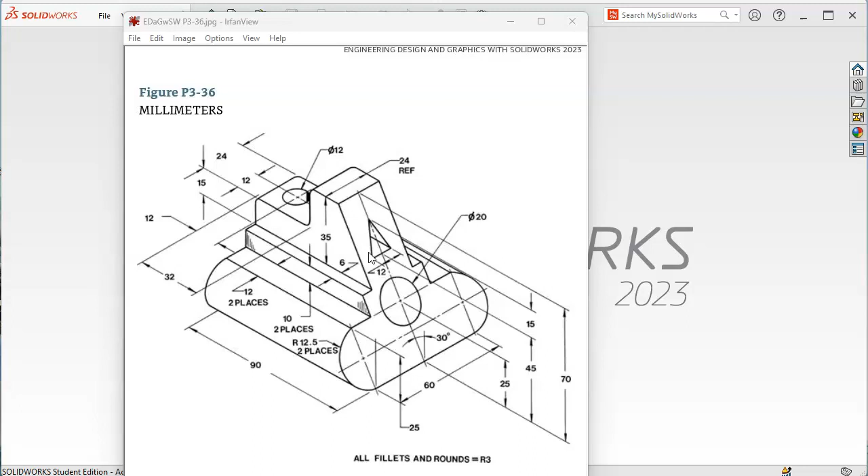The other issue is with this kickback 30 degrees, these geometries, we're just going to assume that they're on the face and that they'll probably be a little bit skewed, but within our tolerance zone for what we're designing of a widget, that this shape, the little cosine error will not be overwhelming

for our geometry. If we needed it and we had to cut that shape, there would be a slightly different result, but let's make this easier, not harder.

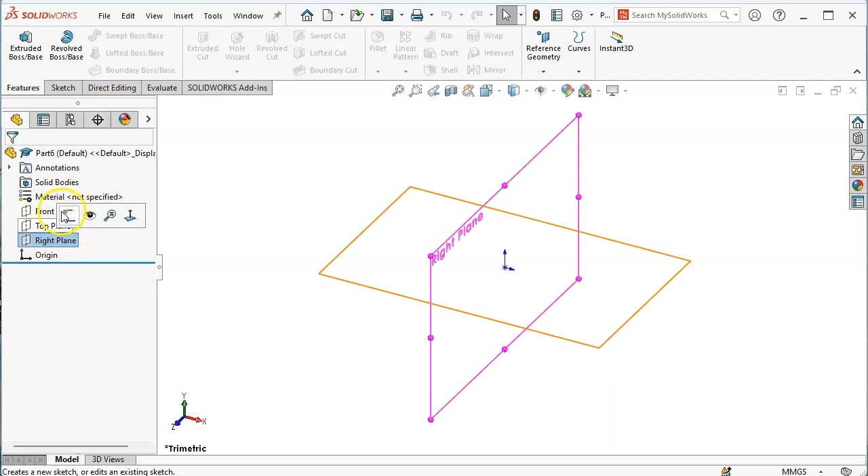Okay, new, same as coming over to the new, and we'll open up the sketch on the right plane. You should be getting a real good feel for symmetry and picking the center line. This one we want vertical, infinite length.

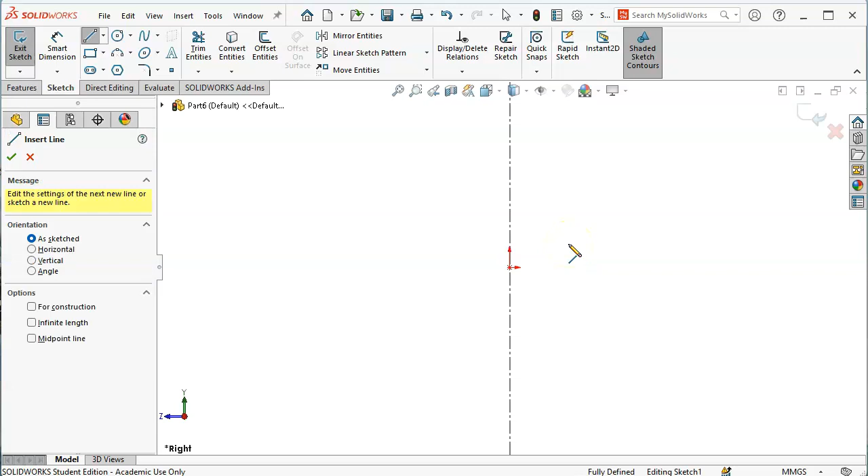Place it on the origin. It's easier to escape than it is to try to back out the line command. So L on the keyboard.

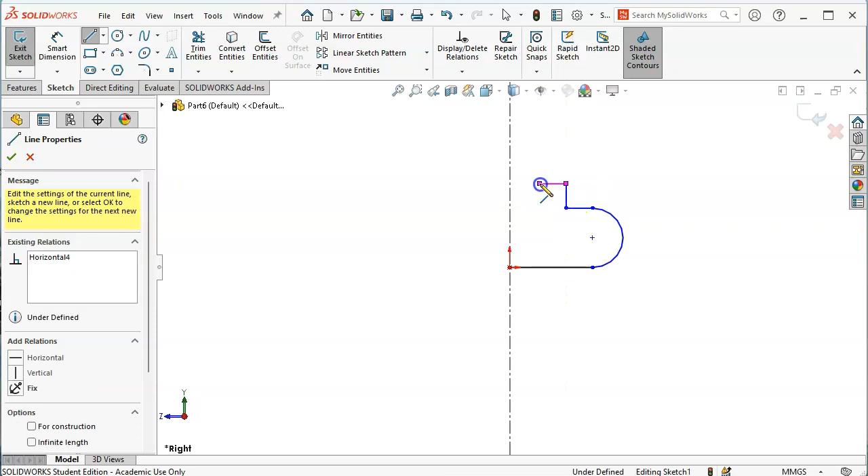We'll start at the origin, and I do want to take advantage of the continuous arc here. So if I draw the line, go back to the starting point, then I can bring my arc up and around. So up, over, over, up, over, right click, select, window pick from right to left, mirror entities.

Looks pretty close. Smart dimension, we're going to go with across the front to the centers, so pretty much that line is 60.

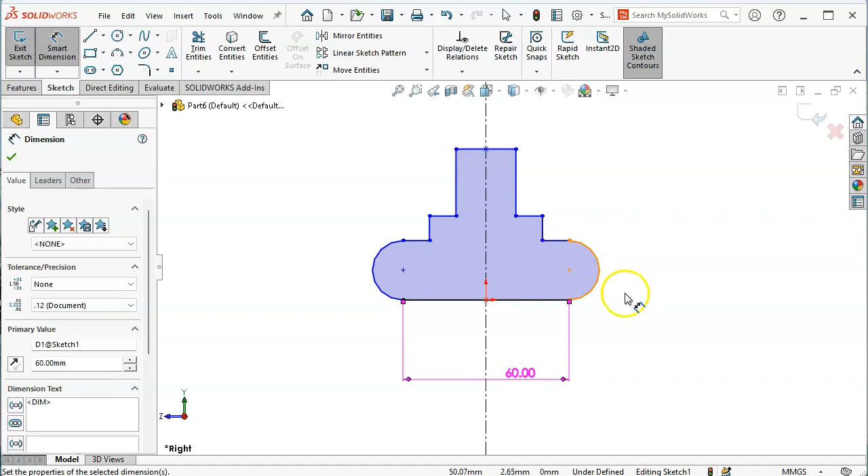The height is 25, so we're either going to go with the 12.5 or the 25, so 12.5 will work.

We have 6 millimeters across that flat, 24. So somewhere, I guess the 24 reference, we're given a 12 there.

Let's see what we have for heights. Have the 25 there, the 15, 10 millimeters on the step.

And that's kind of the problem with the dimensions overlaying the part. Sometimes they're hard to see in 35.

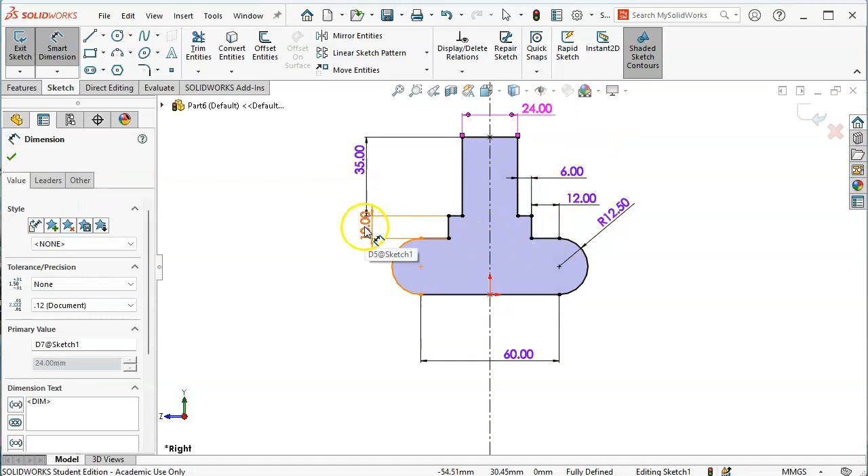So the reason that the 24 then is a reference, in this case it's going to cause us to be overdefined because the combinations of 12, 6, 60, that should be a resulting number, not a driving number. So let's go,

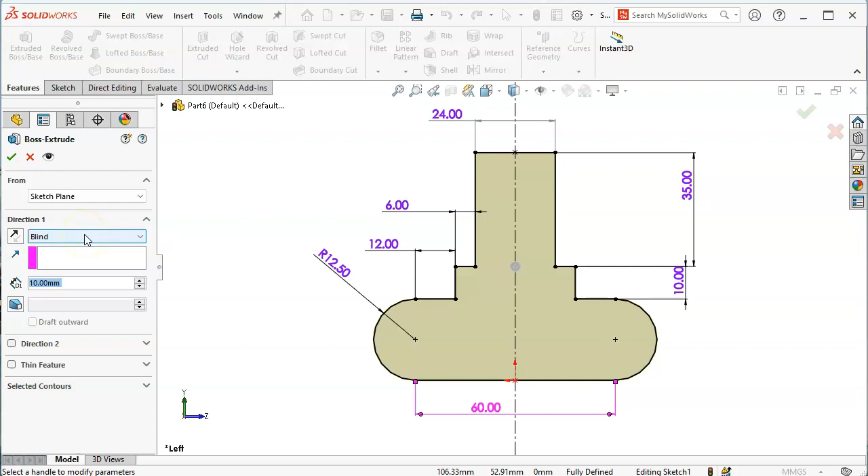playing with the views again, let's just go with the extrude. We have an overall of 90, and we'll go ahead and accept.

All right, so the origin ended up over here. If I want to reverse that, I can switch the direction, but I pretty much have to make that decision now. It messes with the other sketches if we wait too long on that one.

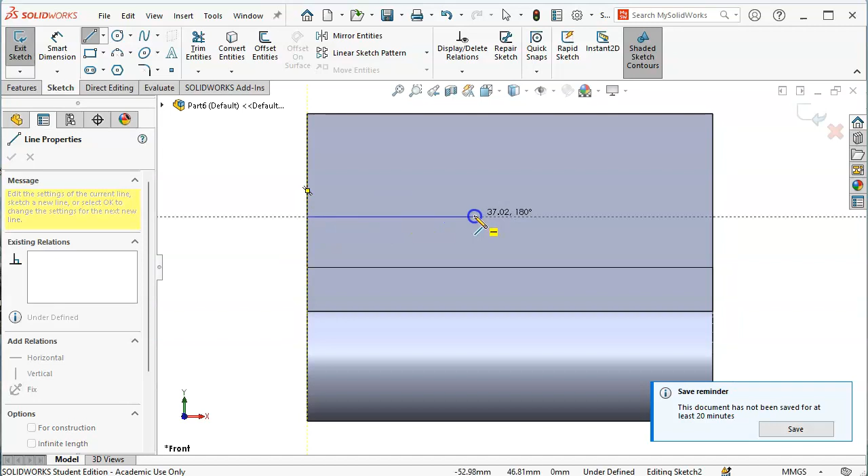So front plane sketch, I'm going to go with the open contour, but with the open contour, make sure that you connect enough geometry that it is continuous. So if I set my pencil down, go up over, I will be able to cut

all the way through. If I eliminate that line, then I pretty much have to draw the other two lines to close off the region.

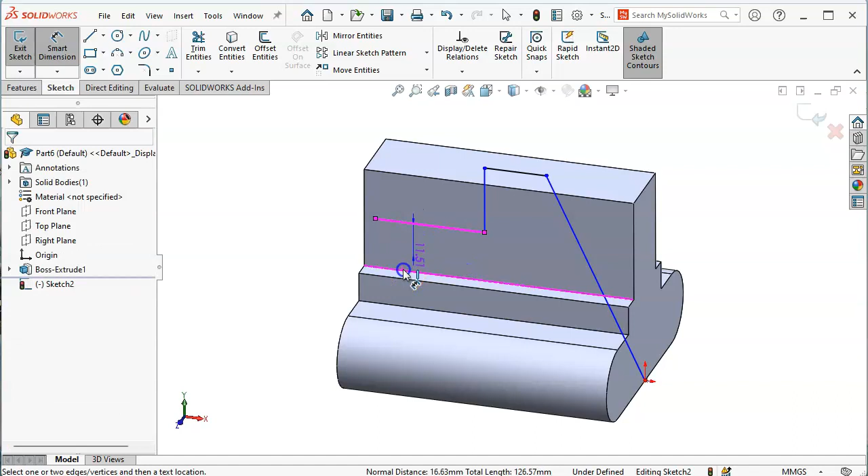So our dimension is 15. Nope, that's from the step. So from the step up is 15.

Let's go back to Control 8 to get in looking at our geometry. We have 32

and then 30 degrees. And as I go through the angles, it's going to show me the other solutions. So we can just keep moving until we figure out which one we want.

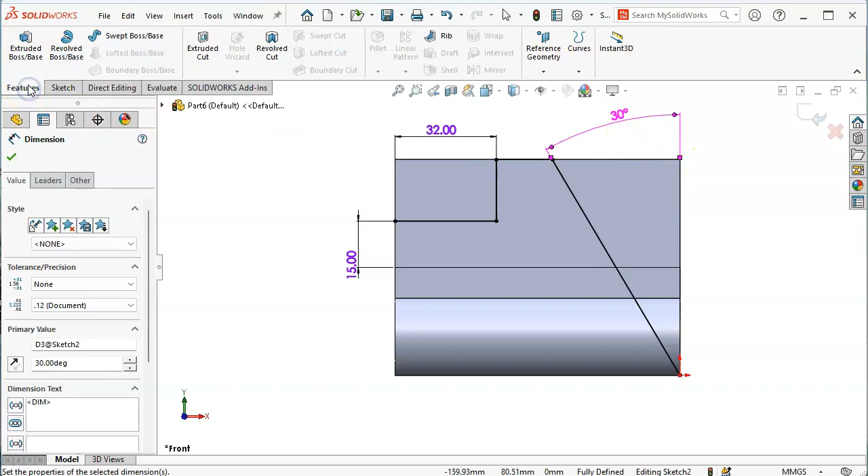Extrude cut through all and through all.

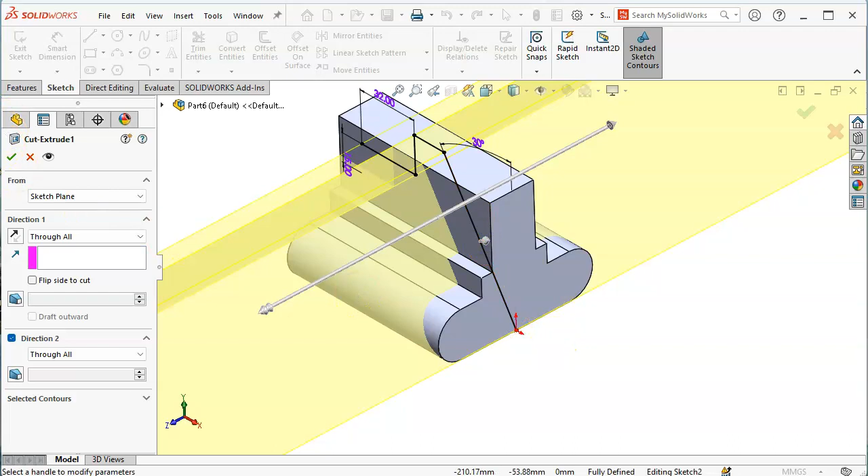And I forgot to look at the little arrow. So if we edit that again, the arrow is pointing this way, which was the desired result. If I flip or hit the arrow, then that's going to determine which side the cut gets made on.

All right, so I did not put the geometry on the end face. So let's go to the right plane again, and we'll sketch it in. Maybe we'll throw that one in there as a direction of cut.

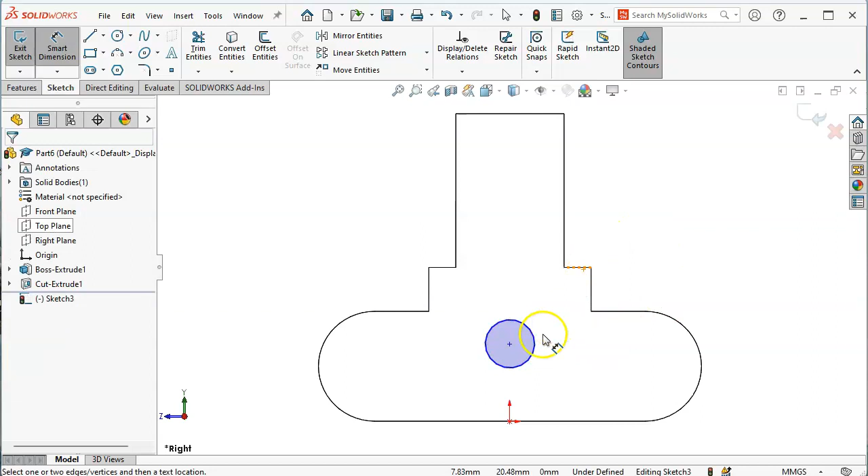All right, so we have 20. And let's go ahead and put the 25 on before through. I'm not sure if that's going to move, so probably safer in this case to not align it to the edge. The center point and the origin can be vertical.

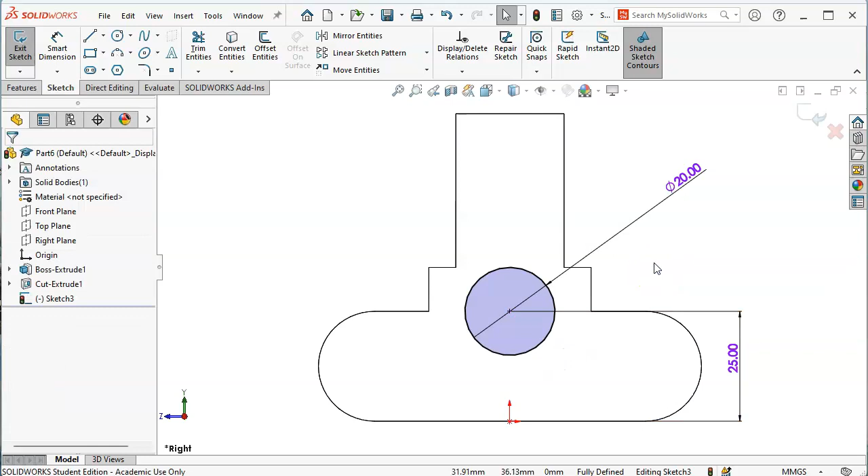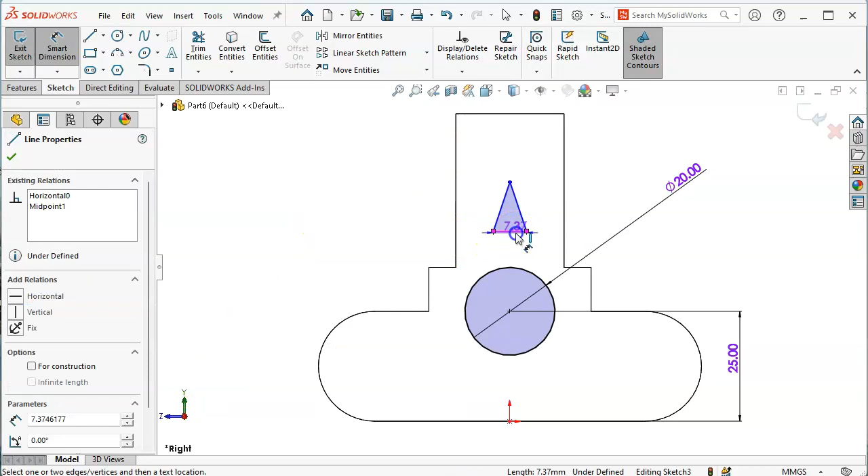And then if we go with the triangle, then I'm going to right click, select the midpoint, control select the vertex, control select the origin, and make those vertical. All right, and then our width is 12, and the height is 15.

And the bottom is 45.

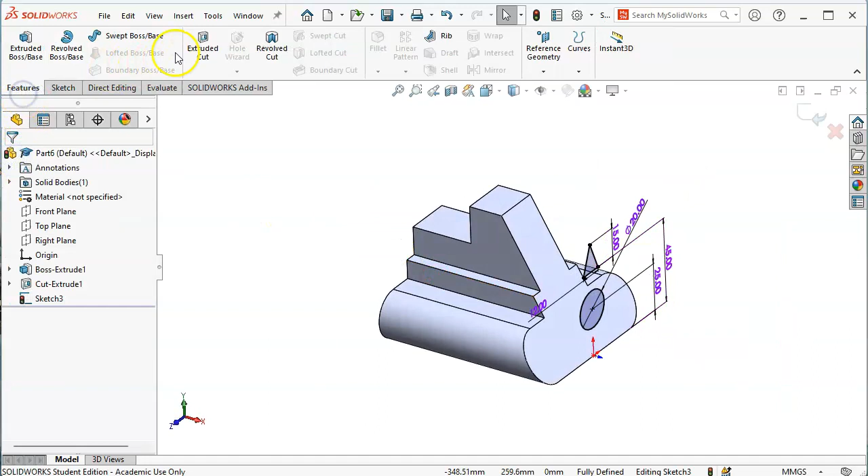Okay, so if we cut extrude, and I tell it to go through all, I can see the preview and I have to decide, well, is that what I really want? So in this case, everything's closed and I don't have to use the selected contours.

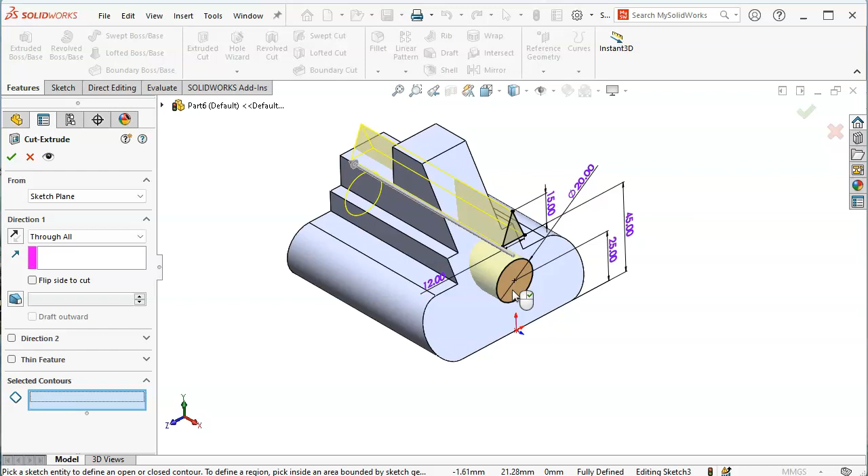But if I want to use the same sketch but have different end conditions, then I'm going to have to create two features using the same sketch. So let's just say the whole thing can go through all, and expanding out, selecting the sketch, doing an extrude, we go back into the contours.

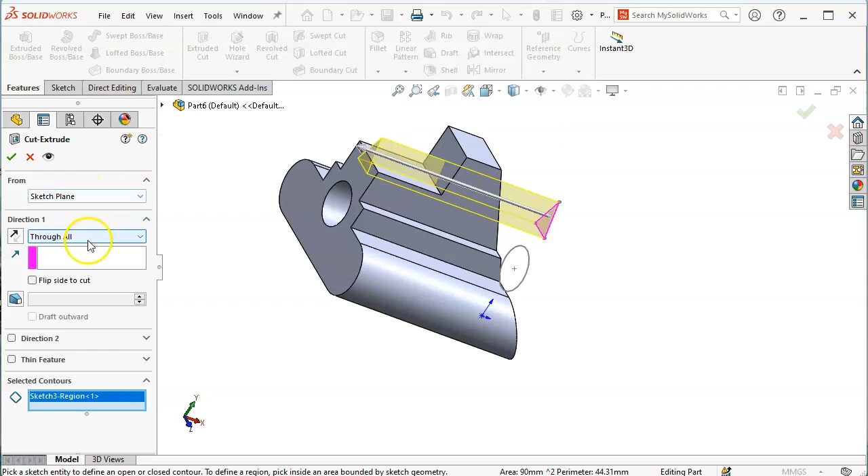I usually clear out sketch 3, and then let's just tell it to terminate up to surface, and we'll pick that surface. And it doesn't quite go all the way through.

The other item we might do is up to vertex. All right, so up to vertex and up to surface in this case produce the same thing.

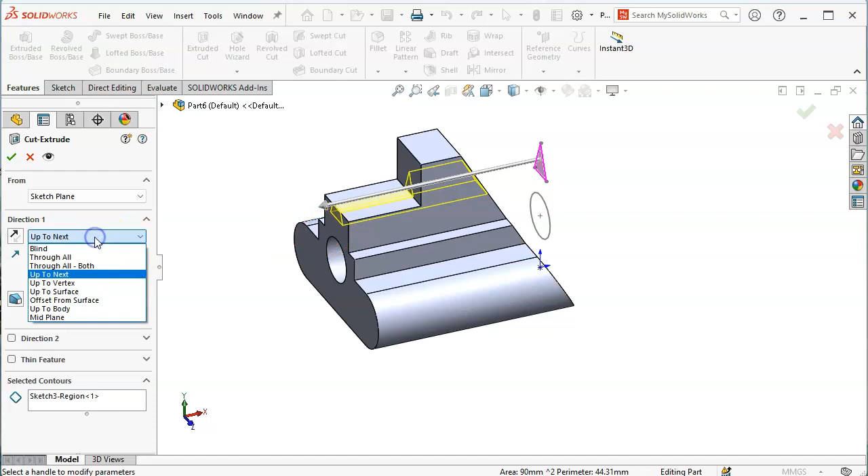If we wanted to offset a millimeter from that surface or generate whatever, we could run through that. Up to next, well, it's going to find the end geometry. So let's just stay up to surface, pick the face, and go ahead and hit OK.

So that's kind of weird geometry, but we'll go with it. All right, so from that surface to the vertex, and we go find our measure tool. So over to evaluate, measure, and we'll extend that out.

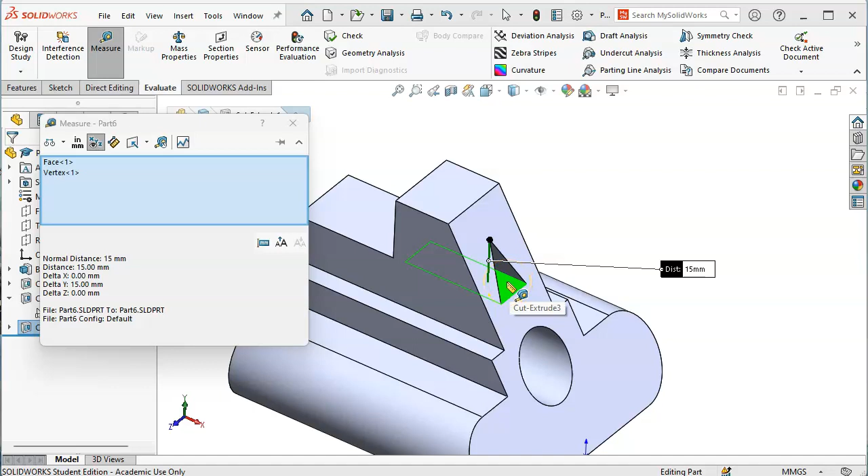Well, it's still at the 15 millimeters. So in that case, the geometry did not get skewed. There would have to be...

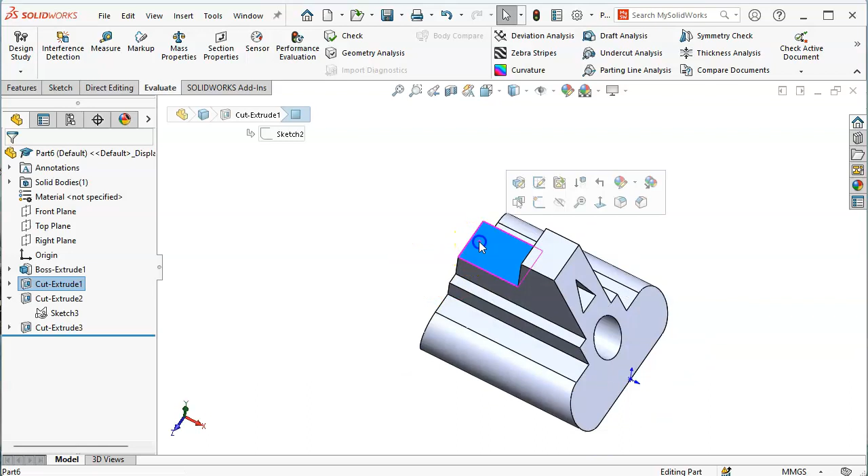If we drew it on this face and drew it 15 millimeters, then in relation to that surface, then we should be a little less on the overall height. All right, so just thinking through my what-ifs.

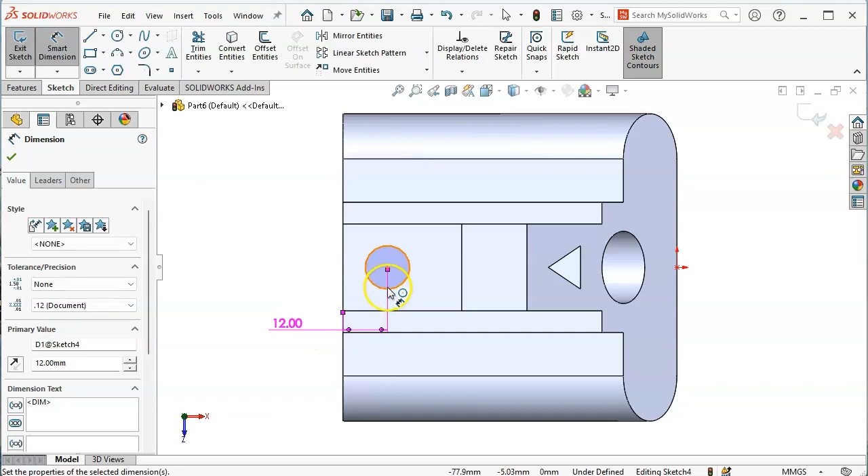We'll go ahead and just draw the circle. Center point to the origin is horizontal. Our distance and depth goes 12, and then we have 12 from the end, and a diameter of 12.

And we'll extrude cut through all and accept. So the last geometry is the fillets and rounds, R3.

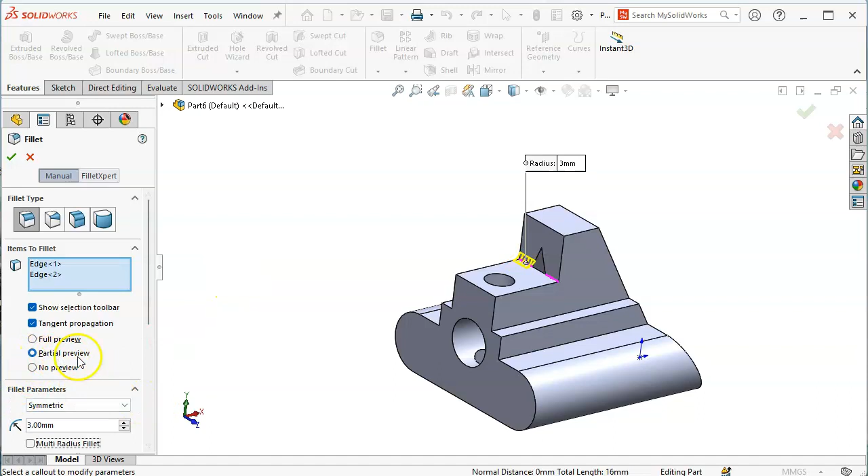So if I select those two edges, up, slip, we'll go into the fillet, and we're going to put 3 millimeters on it. If you don't see a preview, make sure partial preview. Most of the time you don't need a full preview, and if it's a lot of surfaces, you probably don't want those anyway.

And oh yeah, it looks like there is one across the top. How about that? So let's go ahead and pick those 3 items and finish our geometry.

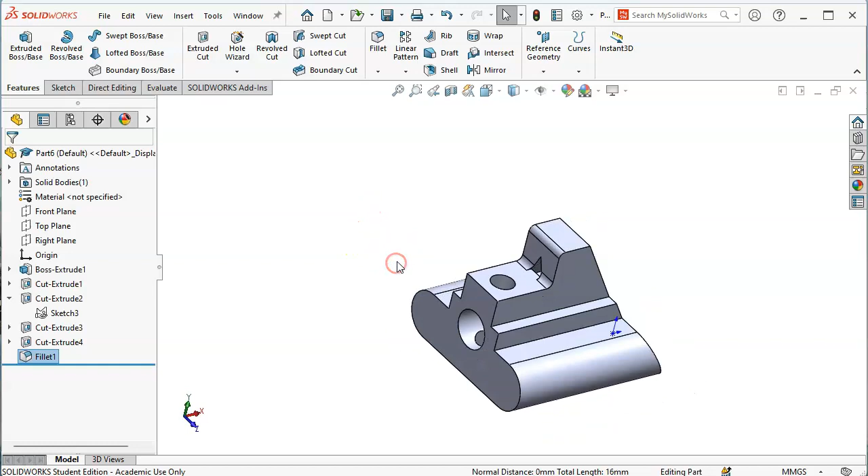Okay, so the order of the fillet also plays a part. One of the reasons I put the fillets in last is this shape would maybe get a little more complex if this fillet was trying to even partially wrap up that face.

So, all right, we'll go ahead and save this. I think I got everything. Nope, looks like there's one more fillet on the back.

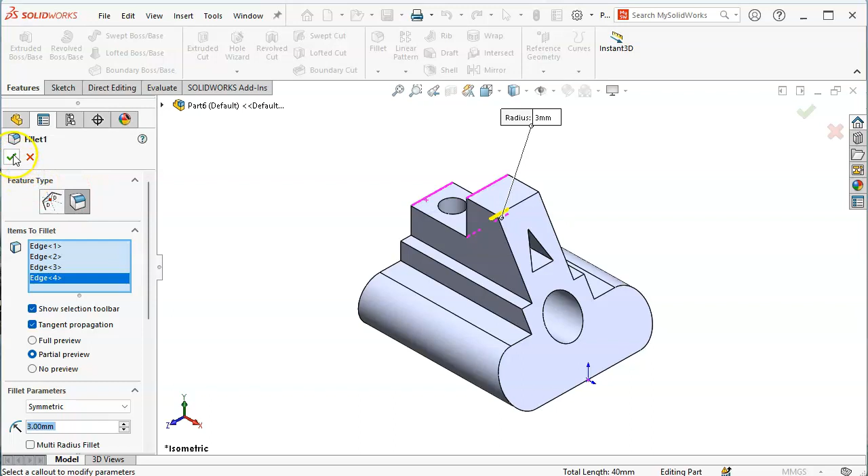So edit the feature, make sure that I'm selected, and we'll go ahead and save it. All right, now I think I got all the features. So we'll do the P3-36 and save.